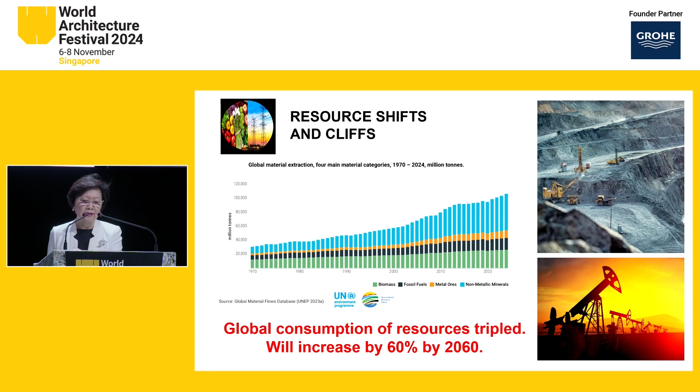So we really need to build smarter in a way that reduces raw materials, reduces carbon emission, saves the energy that is needed, and even shifts our diets to reduce food waste and reduce land needed for food production. So there's a lot to think about to rethink systems. How do we consume smarter, create more with less for everyone?

These problems are multifold exacerbated for Singapore, which has no natural resources. We only have a land of about 734 square kilometers. What is that? That's only about half the size of metropolitan London, but we are a country, we're not a city. And there are lots of challenges, and key for us is resource resilience. Do we have enough land, energy, water, and food? Really quite basic, right? But let's just have a look at land.

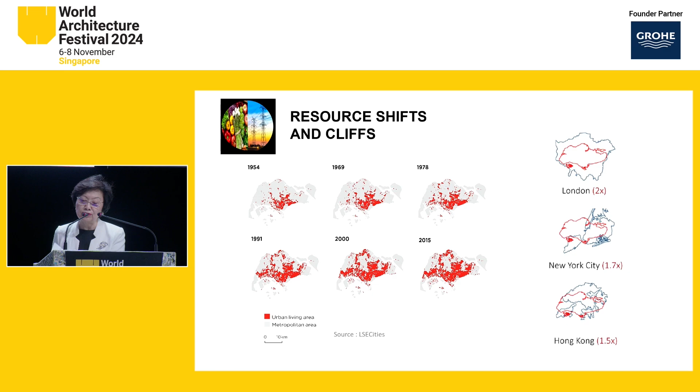If you look at Singapore, we've urbanized quite a bit over the last couple of decades. Right now, we are about middle age, with more land urbanized, and more sites will be brownfield. Development will come from brownfield sites. So the challenge is, how do we create a virtuous cycle of land stock for future generations? And how do we ensure water, energy, and food security?

Next, the world is far from achieving the global goal of limiting temperature rise to 1.5 degrees centigrade. The collective international climate change action will compel us to live in a carbon-constrained world. To hold 2 degrees increase by 2050, we need a 64% reduction in greenhouse gas emissions compared to 2019. To limit the increase to 1.5 degrees centigrade by 2050, we need an 84% reduction in greenhouse gas emissions. Looks such an impossible task.

In 2 weeks' time, I'll be in Baku, Azerbaijan, and there'll be a lot of talk shop, but I don't know how much action will be taken. So we really have to work very hard on this.

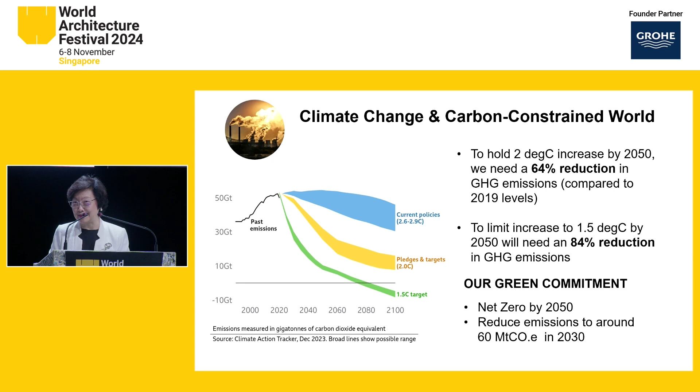Singapore, even though we're very tiny, has committed to achieving net zero by 2050. But for us to achieve this is really, really not so easy. So it's very challenging, even though we set ourselves that goal.

Our city is also aging. There is what I call a global aging challenge. Globally, our populations are rapidly getting older, except for parts like the African continent. And Singapore is aging very rapidly. We will be super aged in 6 years' time, very fast, with 1 in 4 being 65 years old. And this rate will accelerate to 1 in 3 by 2050. So you will see a lot of us aging by the time you come in 6 years' time.

And of course, with that are many challenges: rising needs and costs for healthcare, support for the elderly, and how do we achieve healthy, purposeful, and productive longevity?

But our city is also aging, not just us, the human beings. Our city infrastructure is getting older, and according to a Global Infrastructure Hub, the world is going to face a 15 trillion gap between projected investment and the amount needed to provide adequate global infrastructure by 2040.

There are some interesting statistics. US infrastructure was recently rated D+ overall. 85% of EU buildings were built before the year 2000, and among those, 75% have poor energy performance. I'm told that in Italy, some 300 bridges are at risk of collapse. There are also a lot of power plants in Europe and other places with load shedding problems. I was in Cape Town last year, and this was a huge problem. In Singapore, our infrastructure is also aging.

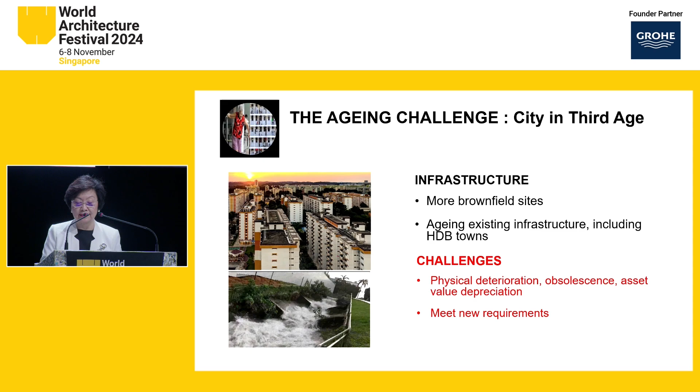An estimated 50 to 60% of Singapore's existing infrastructure will be over half a century old by 2040. And by 2050, some 33% of our public housing buildings will be 70 years old. 80% of the people in Singapore live in public housing. So we have to deal with increased prevalence of physical and functional deterioration and obsolescence, and also deal with stranded assets.

Finally, one big change is we have to cater to new economic models. The world has changed with technology, digitalization, and the advent of AI. Everything changes: live, work, play, learn. So how do we deal with that?

There are changing priorities and lifestyles of people. Right now, the jury is out on whether remote working is going to stay, because all the bosses say you better come back or you'll be fired. But the rest of us would love to work from home. We will see this changing, and there's been a big impact on real estate, commercial nodes, and new ways of working and living. So how do we make our cities relevant and continue to be attractive? I think that's going to be the big challenge.

For Singapore, we have a long-term planning process to try and deal with all these uncertainties. We have a long-term plan that we work on every 5 to 10 years, with a 30 to 40 year planning horizon. It's a very broad structured plan, although we have very detailed plans too. But we have to change the way we are planning, because the process has to change due to the uncertainty and volatility going ahead.

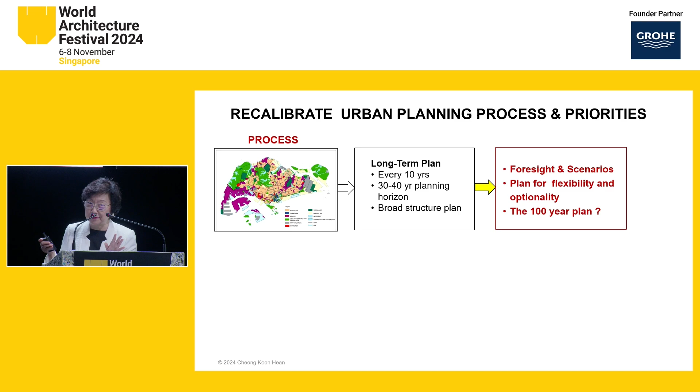So instead of doing specific plans, we now look at planning different scenarios. I actually advocate we should look even at 100 years. I know a lot of people think it's impossible, but I'll explain why a little later. At the planning level, as the complexity of urban issues and the pace of change have increased, planning projections for Singapore's long-term plan have evolved.

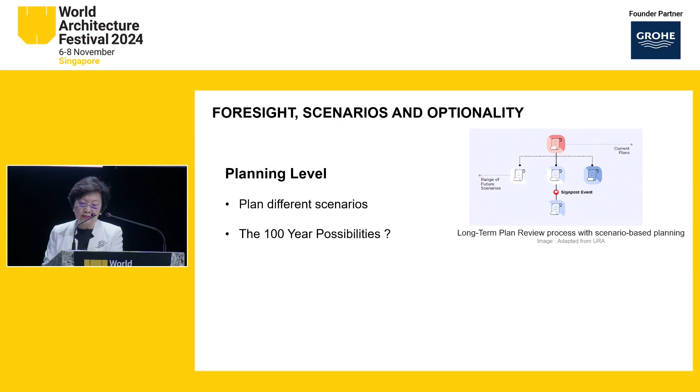We have to be preemptive and take a scenario-based approach. Urban planners have to consider multiple pathways and project a range of possibilities, not one plan. What if this happens? What if this happens? We have to put in place signposts that will help trigger reviews and decisions down the road. These signposts are really metrics we need to know, affecting the economy, health, social attitudes, social changes, demographic changes. We need to know these metrics because they raise red flags for us to know we need to change, because no single plan can stay the same forever.

So it's a very important consideration: signposting, and we have to scan outliers and emerging trends. For Singapore, our development going forward would largely be brownfield, probably 80% of brownfield sites. But they provide new opportunities for rejuvenation at scale, and we have many projects. For those more familiar with Singapore, we have multiple ideas for rejuvenation.

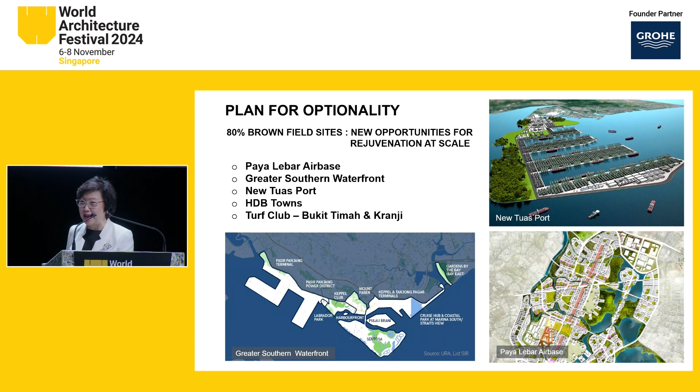We are going to move the Paya Lebar Air Base. We have moved the city port to the west, which frees up the entire Greater Southern Waterfront for new development. So we're going to build a new Tuas port. And we have many other large swaths of land that we can rejuvenate. So while we say we have no land, we do have land if we plan very well.

Another idea is that land use flexibility can provide very strong flexibility in the way we plan the city. Where you are now in Marina Bay, we first introduced the idea of the white zone, which allows the developer to put in multiple uses as needs change over time. Although the Urban Redevelopment Authority will stipulate a minimum component of specific use or specific uses to meet its planning intentions, we will introduce more flexibility into zoning. I think architects don't like the word zoning because it restricts what they can do, neither do developers. So the idea is to introduce more flexibility into zoning.

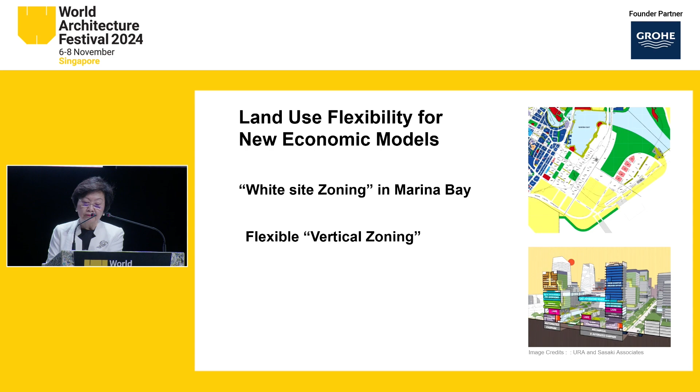For instance, we will explore vertical zoning in our industrial estates, which can integrate complementary uses. For example, you can have clean industries on the ground floor, and in the mid-floors you could have co-working spaces which buffer residential housing above. That is possible. Other ideas for land use flexibility include a business-white zone which allows industrial developments to have a greater proportion of non-industrial uses.

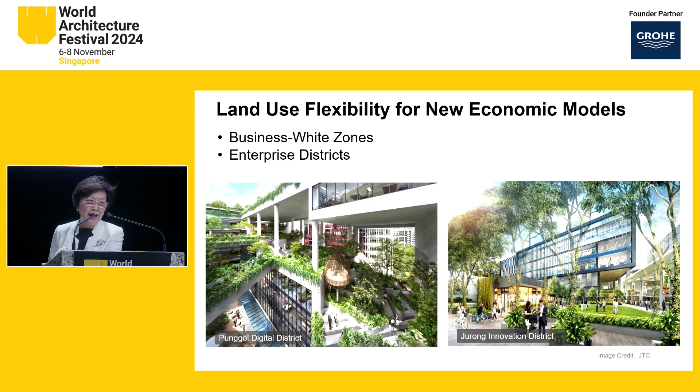So you can integrate the entire business value chain as well as complementary amenities within the development, adding co-working spaces, retail, food and beverage. But we are also looking at enterprise districts which allow a large master developer like the Jurong Town Corporation to use spaces across the district instead of being subject to existing development rules for each site.

So we talked a little bit about planning processes. But in addition to the process, our priorities need to change and be reconsidered. Traditionally, we are very preoccupied, especially in Singapore with very little land, with safeguarding and optimizing land and sea space and creating livable environments. This is a very common planning objective across most cities.

But I think we need new urban lexicon and vocabulary going forward. We now need to think about regenerative thinking, resource resilience. Our growth needs to be sustainable. Can we think of circularity as a principle? Can we steward nature? How do we build a healthy and high urban quality in our cities? These become new ideas and new priorities in the planning of cities.

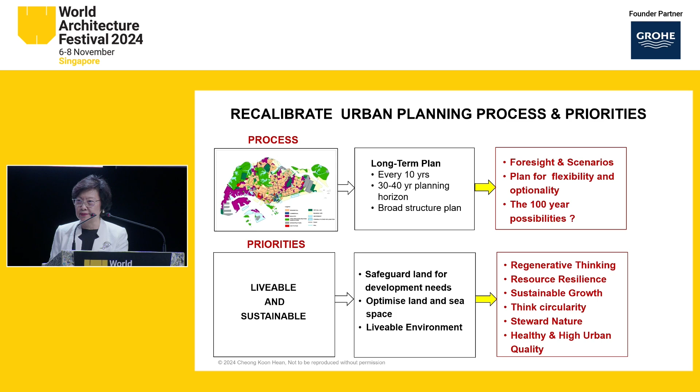So what is regenerative thinking and regenerative design? I think most of you know what it is. In very simple language, it is just about shifting from doing less bad to doing more good, and regenerative design is about achieving net positive outcomes. Not so easy to do, but the idea is that we must restore and rebalance our relationship with nature. We need to design a future where buildings are net positive, where infrastructure increases biodiversity, where urban planning restores natural ecosystems, and so forth. So there needs to be a paradigm shift in our thinking.

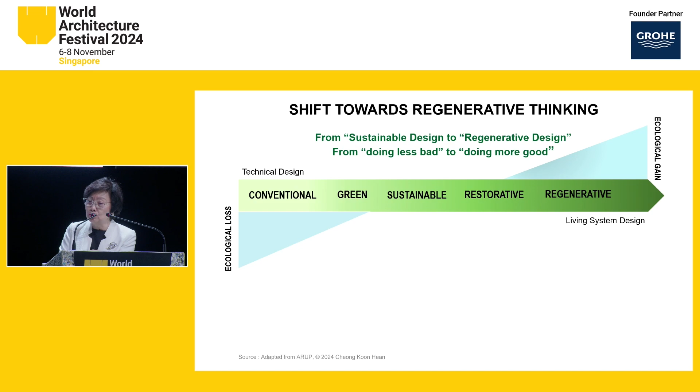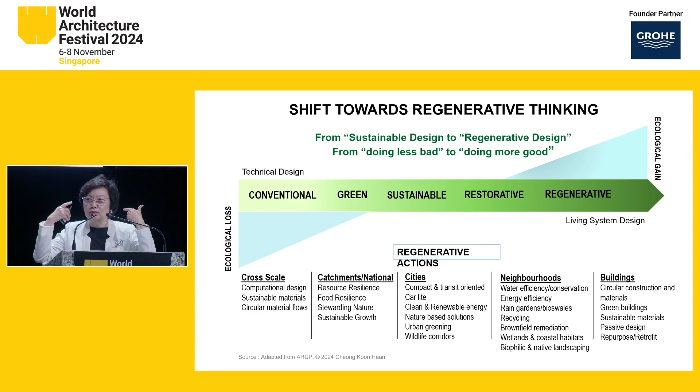Actually, it's not enough to just be sustainable, but to do a lot more and look at regenerative actions which can take place across different scales - national scale, cities, neighborhoods, and buildings. I won't go into this because in itself it's a very huge topic, but the point is we need to shift our mindset forward, going forward.

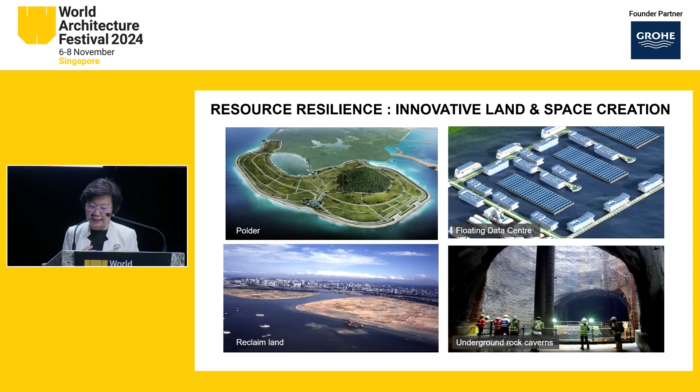So resource resilience, particularly for Singapore, is so important. And especially in finding land, how do we create space in a very innovative way? We have already tried many things, right? Reclamation, we have developed underground spaces, we built polders, just like in the Netherlands. But going forward, other ideas are important, like multifunctionality as a principle.

So let me give an example. Singapore is very low-lying, and being a city-state and an island, we are in danger of sea level rise. So we need to protect our coast. So we have already planned ahead to develop and reclaim this long island, which is about 15 kilometers long, about 800 hectares large.

And the idea is it will protect the entire low-lying East Coast. But it is the way that we will have to do it, in a very multifunctional way. This land, the way we reclaim, will not only be for housing and recreation uses, but we will also reclaim it in such a way that it can store water. So you notice that the land doesn't take up all the space - we create a new basin for storing fresh water.

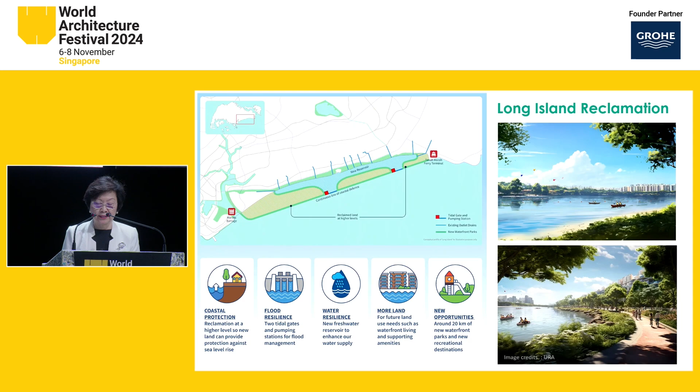So I will talk a little bit about water in my next slide. Water is existential to Singapore. We need water to survive. So we've worked very hard to close the water loop. So this is the idea of resource resilience.

And to do that, we rely on 4 taps. One is imported water - we do import water traditionally from Malaysia as one big source, but you can appreciate that Malaysia too will need water. We cannot rely on that forever. So the second tap is domestic sources, NEWater and desalinated water, which I will walk you through.

Domestic sources means that you pray very hard and it rains. Actually, in the tropics, there is water. But why is it that people say they don't have enough water? The key is that we are not collecting efficiently. There is water, but we're not collecting it.

So in Singapore, we've done it in such a way that it's really a sponge city. Two-thirds of Singapore is water catchment, and we will increase this to 90%. So everything that falls down, we collect - we collect everything. But if you collect, you need to store it. So in tiny Singapore, we have 17 reservoirs. All the inland water bodies and rivers are converted to freshwater reservoirs.

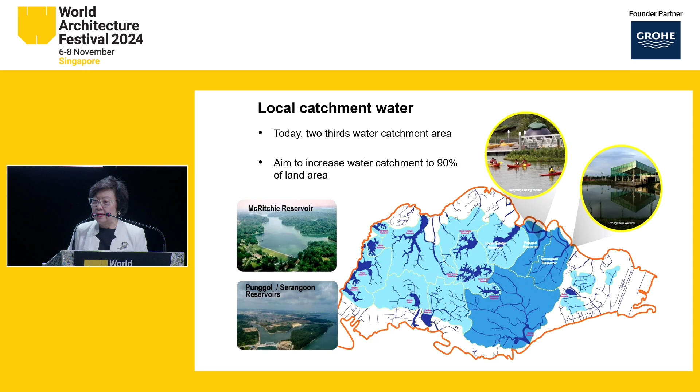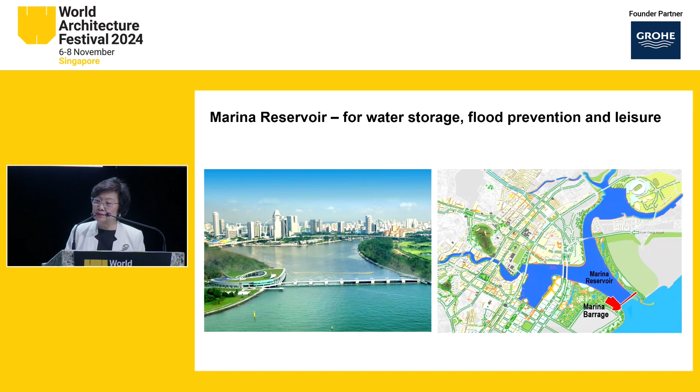A very good example is right here in Marina Bay. When we reclaimed the land, we built a barrage and we created the largest freshwater reservoir in a city, probably in the world, because we collect everything that falls, right? Another idea is really NEWater - we recycle all used water. So maybe you had a drink of water in Singapore. Guess what? You might be drinking a lot of other stuff too.

But don't worry, we only put very little of recycled water back into the reservoirs. Most of it is so clean that it's used for industry, for example, wafer fab production.

What is interesting is that to recover the water, everything from what you flush to what you wash, we have introduced this idea called the deep tunnel sewerage system. The DTSS is about a 200-kilometer massive superhighway for water, 15 stories deep underground in Singapore. Through gravity fall, we collect everything into the water reclamation plants that are placed underground, and the water is processed and purified into new water.

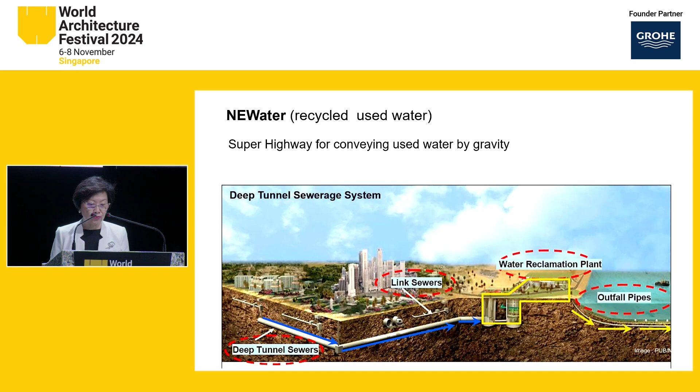Of course, we also do desalination, but this is one of our newest desalination plants. It's right in the middle of a park. So again, the idea of multifunctionality. Underneath are a lot of pump rooms, but above is for recreation. It's a beautiful park. You can go there, you can jog, you can run. This idea of multiple uses of infrastructure with recreation and other uses is very much in our DNA when we design and plan.

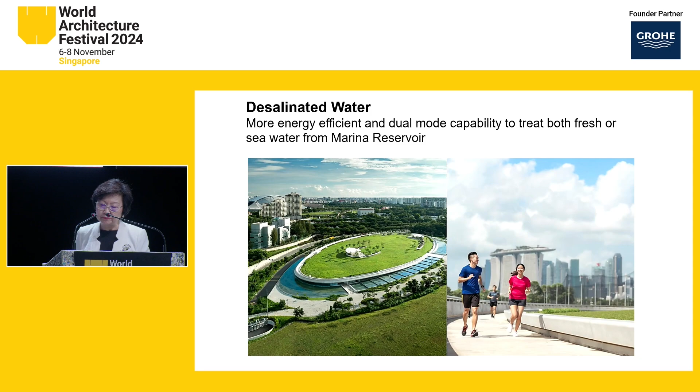But while we've closed the water loop, we have a new problem. It's energy. Because to desalinate and to use membrane technology to recycle water, you need energy. And we don't have energy. We import almost everything. So what we've done is we have tried to strengthen the waste, water and energy nexus.

So what we have done in one of the latest state-of-the-art infrastructure is to co-locate the Tuas Water Reclamation Plant with the Integrated Waste Management Facility. In Singapore, how do we deal with waste? We have no place to chuck our waste, we only have one landfill offshore. Everything is incinerated, but you still have the ash after you incinerate, right?

So when we incinerate, we generate heat, the heat drives the water reclamation plant. But when you reclaim water, sludge is left over. The sludge is converted to biogas that in turn generates electricity for the incineration plant. So here the idea of circularity becomes very important to close the loop for energy. And yet you are now using energy to create water, but you are using water to create energy. So I think these ideas of circularity are absolutely important for all cities.

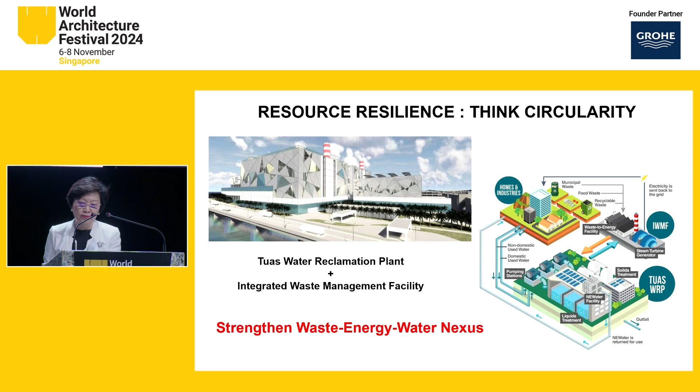We have 4 taps for water, but we have 4 switches for energy. We do import a lot of gas. We are mounting solar panels everywhere, but we are also tapping into regional power grids in ASEAN to buy energy for Singapore. In fact, there is a private company that's going to put solar panels in Australia, and they're going to pipe all the energy all the way to Singapore, the clean energy just generated. We're also looking at emerging low carbon alternatives, green hydrogen, for example, and carbon capture.

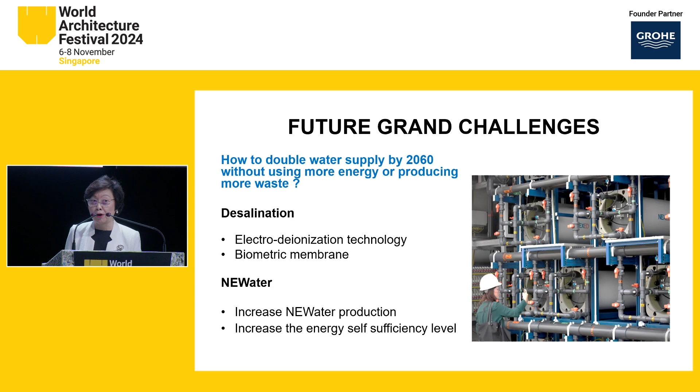I also want to say that we continue to try and innovate. So how do we double our water supply by 2060 without using more energy or producing more waste? We are looking at new technologies like electro-deionization technology using biometric membranes. They use a lot less energy. And we are going to increase the NEWater production and increase the energy self-sufficiency level. So it's all about innovation, and it's all about adopting technology that is highly innovative, that can solve our problems. So we have to work very hard at this.

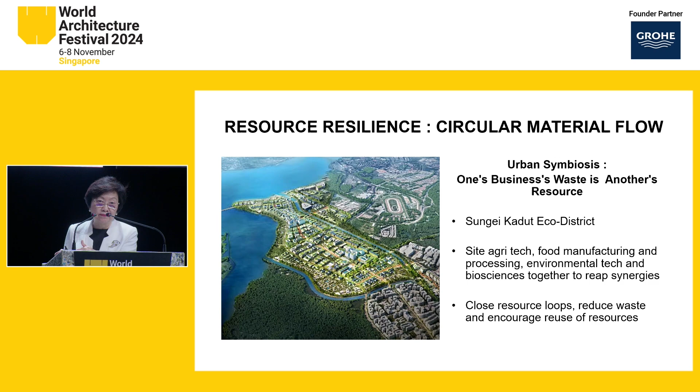And of course, food. While we import food, we try to be self-sufficient in nutrient needs in some of the food that we have in Singapore. So we are converting a lot of roof gardens to urban farms. We are integrating the idea of urban farms in the way we plan our towns. And of course, resource resilience and circular material flow ideas apply a lot in planning. For example, we have this industrial estate whereby we are going to place different types of users together that can feed into each other. So you can have food manufacturing together with environmental tech and biosciences together, because one company's waste can then feed into another company as a material use. So you can do that through, again, the use of urban planning.

So very quickly, city structures are important to mitigate very high densities. And of course, for city structures, we have adopted 3 ideas. One is polycentricity, and we are highly transit-oriented, which means that we have decentralized a lot of our commercial nodes outside of the city area, very well served by public transit. So this reduces congestion into the city, and it reduces the need for cars to move around and emit carbon emissions.

So we have a very dense rail network, and almost 80% of homes will be within a 10-minute walk from a mass rapid transit station by 2030. We're almost there. A lot of the lines have already been built. So we are seeing less people needing to own a car.

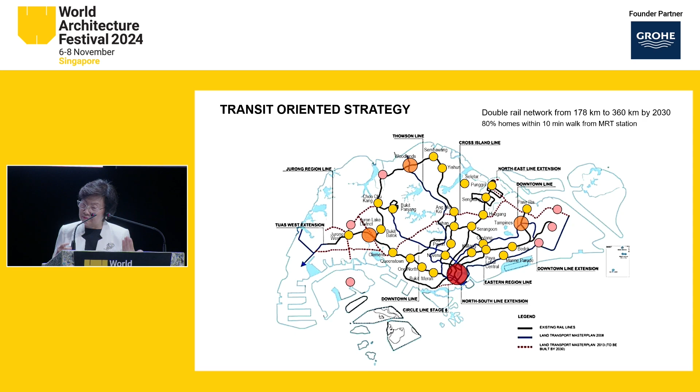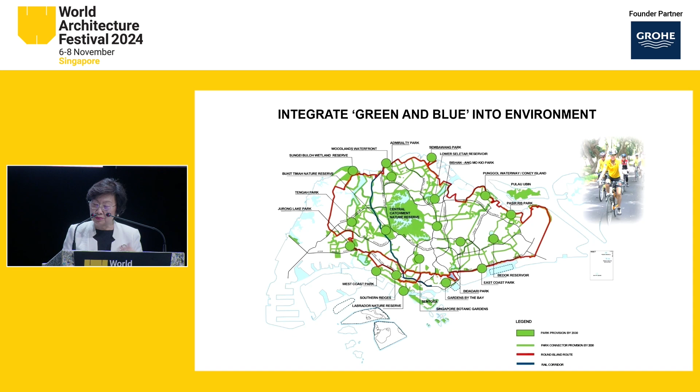In addition to park, it's about stewarding nature. Right in the heart of Singapore is actually a primary forest. And if you are visiting Singapore for the first time, one place I would recommend that you go is the zoo, because the zoo is there. The night safari is there. The bird paradise is there in this virgin tropical forest right in the heart of a very, very dense city.

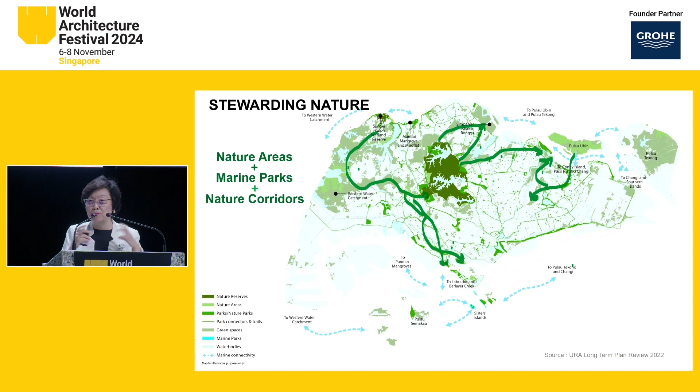And what we do is we link up all the nature areas that we've protected with eco corridors, because these become corridors in which animals and bird life and biodiversity can move from place to place. We too need to create virtual space and the sense of space for them. So Singapore stewards nature. Our concept is about having a city in nature, not just a garden city. So we're bringing back biodiversity into the city.

Now, if you walk along Marina Bay, there are families of otters who live there. You might actually spot them. And actually in the gardens by the bay, which is next to this development, please take time to visit it, because it is also a bird sanctuary. A lot of people go there to observe the birds.

We have Changi Airport, so we're a hub, right? An airport, a good airport, and people transit here. But actually, many of the birds transit here too. They transit from Europe to Singapore to Australia. So we also create transit stops for them.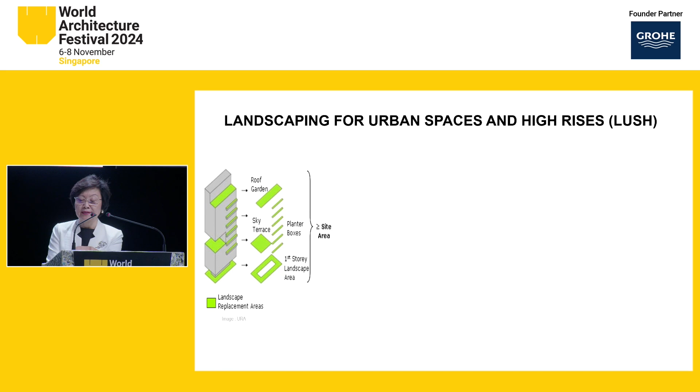But as we use up our land, we start to bring greenery towards the sky. So we have this program called LUSH, the Landscaping for Urban Spaces and High Rises. We incentivize the developers to bring greenery up to the sky and create new recreation spaces. So for example, in Marina Bay, the requirement is that as you build and remove your footprint, you have to put 100% greenery replacement in the sky.

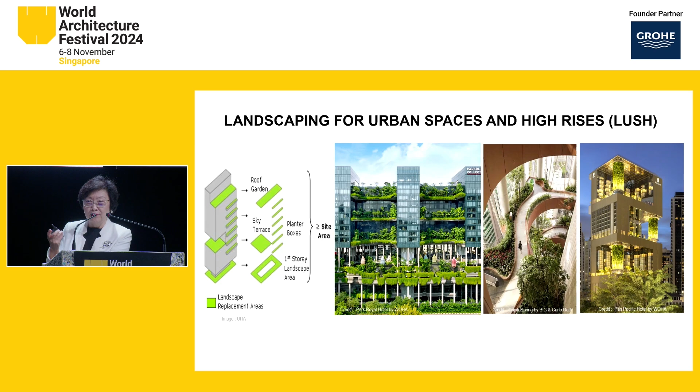But architects have become so creative that most of them now replace more than 100% of the footprint that is used up, sometimes as much as twice or even 3 times through very, very clever design. So we must thank the architects for the creativity.

And we have also converted many of our concrete drains into naturalized streams. And these streams are used as nature-based solutions for floodplains. So therefore, it also adds greenery back into the towns and the cities. So here again, it's multifunctional. It's a park, it's also a floodplain, but it brings a lot of green and blue into the city.

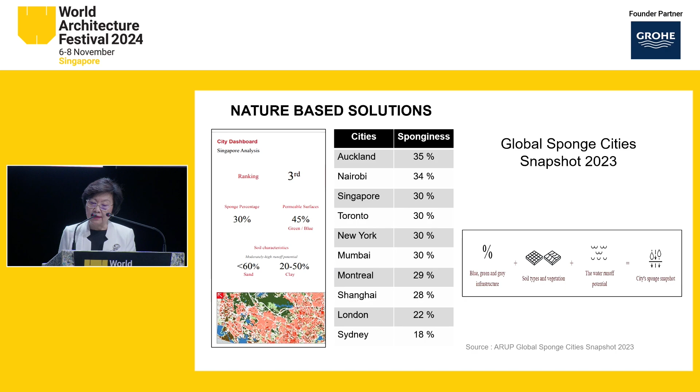So if you look at Arup's Global Sponge Cities snapshot in 2023, it calculates a city's natural absorbency from its green and blue spaces using Terrain, which is an AI tool that digests large quantities of data and satellite imagery. I think this was developed by Arup to help enhance nature-based infrastructure. So Singapore was ranked 3rd out of 10 cities in its sponge percentage, despite being a very high-density built-up city. So it is possible to bring nature in.

Now, very quickly, Professor Ian Goldin, in his book on the age of the city, postulates that as cities compete in the next few decades, unfortunately, only some cities will be the star cities. So if cities want to do well, they must have that high urban quality to attract and to retain talent. At the same time, companies are actually drawn to invest in cities that have ample talent. So unfortunately, it's almost only a very handful of cities that will do very well, and we have to work hard at being one of those cities.

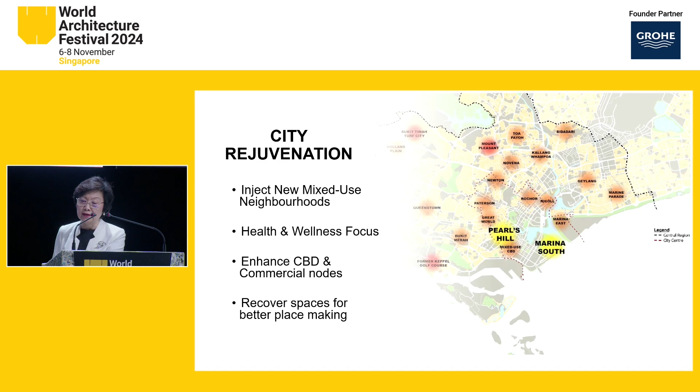So a key strategy is, of course, to develop high urban quality. So we continue to rejuvenate our city constantly, all the time, injecting new mixed-use neighborhoods, having a health and wellness focus, enhancing the CBD and commercial nodes, and great placemaking.

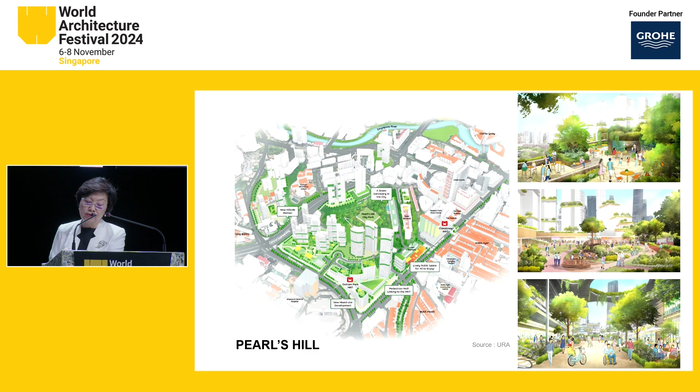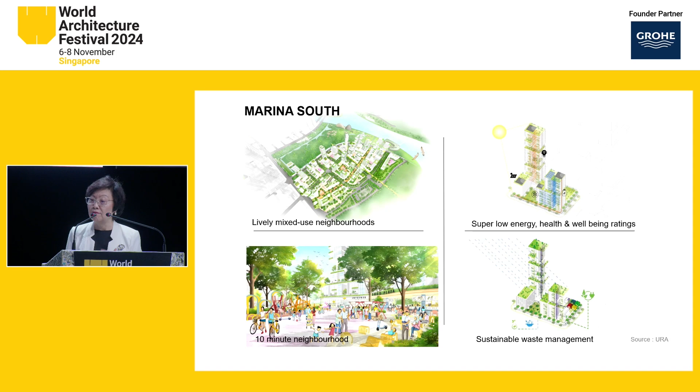So within the city, I'm not going to go into detail, we are going to develop new areas for rejuvenation. This is Pearl's Hill, which will introduce another 6,000 new homes into the area. Marina South, which is just next to us, will be new, lively, mixed-use neighborhoods with super low energy buildings, with health being a very major consideration in the design. 10-minute neighborhoods, very walkable and highly sustainable in its design and construction.

Now, it is really also about rejuvenating the city. Let me try and get back.

In the CBD, we all have downtowns and we worry that they will deteriorate. So we introduced incentive schemes, like the Central Business District Incentive Scheme, to encourage older buildings to be rejuvenated for mixed use. We also have the Strategic Development Incentive Scheme, encouraging developers to get together, so it's not just a single project but with neighboring projects you do a much larger scale redevelopment. Now there's also a lot more housing in our CBD, which previously was quite dead in the evening, but now more housing has come back.

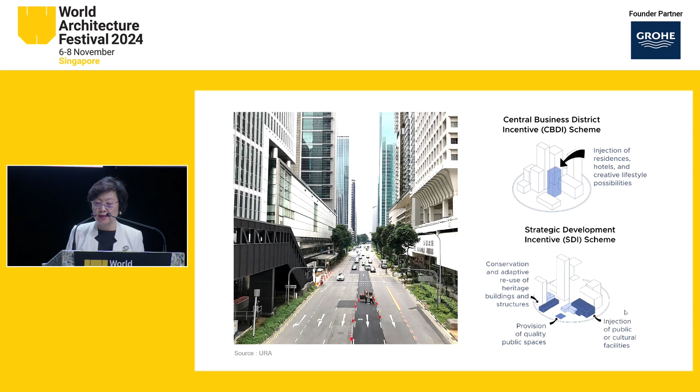And it's really about creating delightful spaces. I'm preaching to the converted here, the architects - placemaking is absolutely essential to have a vibrant city.

I'll run through this quickly as I've run out of time. I want to talk about public housing. In Singapore, almost 80% of people live in public housing - that is the real Singapore, not Marina Bay. So if you have some time, take a train and visit any of the public housing towns, developed by the Housing and Development Board, HDB. That's the real Singapore, and that's how people live. Our conception of public housing in many cities is that it's run down and deteriorates, but our towns are actually quite vibrant and decent. I encourage you to visit.

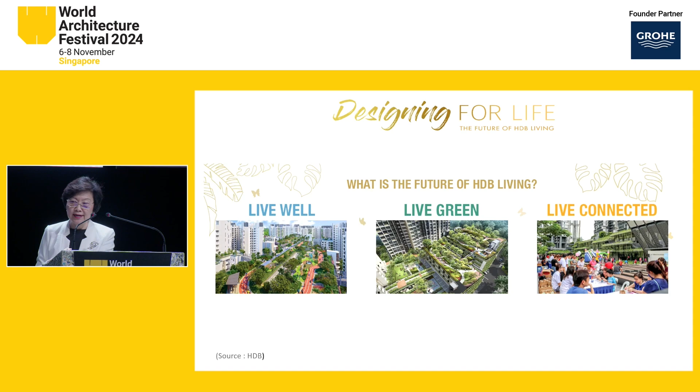Going forward, public housing towns keep getting rejuvenated, and new generation towns have themes of living well, living green, and living connected. These are the types of designs we do for public housing towns, particularly the new generation towns - the quality is good, almost as good as mass market condominiums.

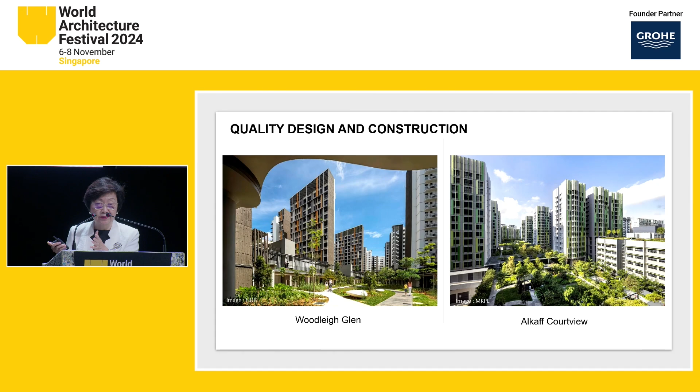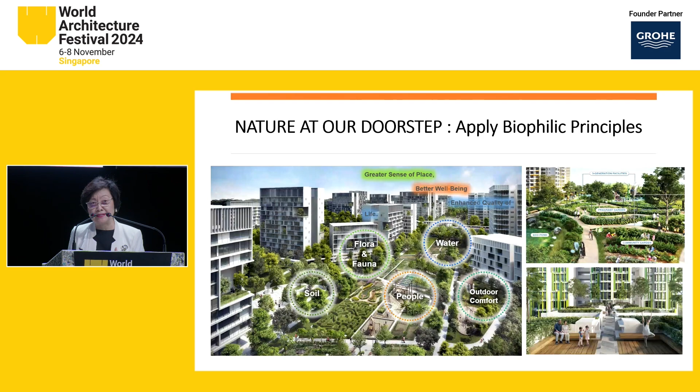It's important - the way we plant, we bring in biophilic principles and this whole idea of regenerative cities. The way we plant is to bring health benefits to residents. We have lots of parks - therapeutic parks, educative parks, and parks for people with dementia - to promote mental wellness. Health and wellness will be a big theme for the design of these new towns.

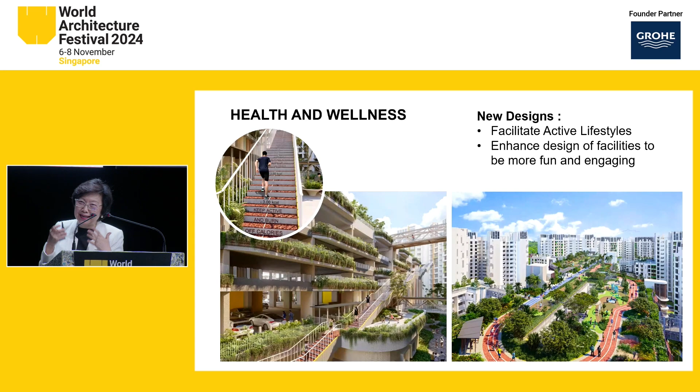This is a real project - we put running tracks on top of multi-story car parks, and we're fitting in motivators and nudges for people to move when living in the town, for better health.

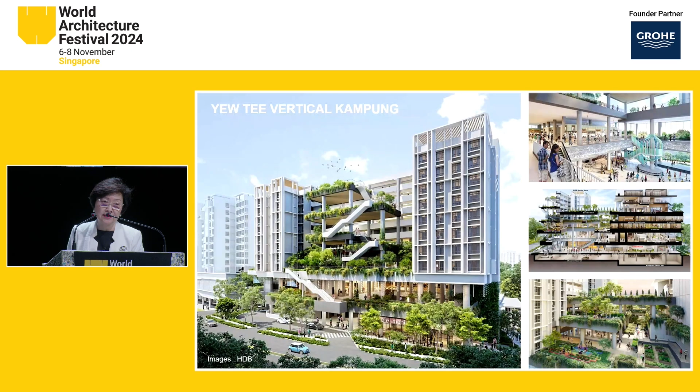A lot of it is mixed use. We're introducing mixed users into the neighborhood centers, with healthcare facilities, shops, and eating facilities. They are gathering points for social wellness and strengthening community bonds, and a lot of activities take place in these neighborhood centers.

As the population ages, we introduce new ideas for housing. This is a new form of assisted living housing called community care apartments. People here are still healthy but might need help with one or two physical activities - they might need someone to cook for them, or help with a bath. So they live here in a community, in smaller flats but with a lot of areas for interaction, and they can subscribe for services to help take care of them.

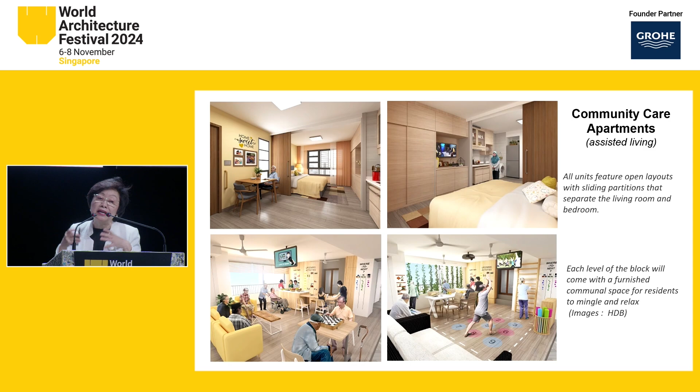So we have the concept of aging in place, trying to get people to age where they live. And there is continuous rejuvenation.

We go back and retrofit and fit out our towns - we have the Remaking Our Heartland programs. We even fit out the interior of the flat - when it has aged, we retrofit new toilets. There's a co-sharing arrangement with the Housing and Development Board - you pay some, but the government pays the majority. We go back and rejuvenate the neighborhoods, and we even rejuvenate all the shops.

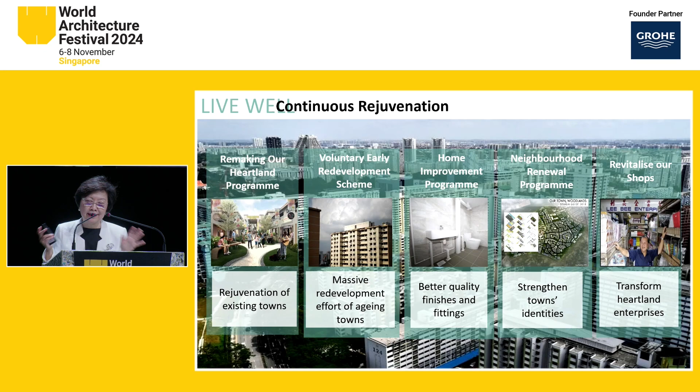This is a topic of its own, and I have no time - I'm only showing one slide. But if you have time, visit the Housing and Development Board, they have a great gallery explaining all the proposals they do.

Finally, it's about building green buildings. I won't go through it in detail, but it's important - I want to encourage architects to think about the way we design. Here I'm talking about building level, not city level.

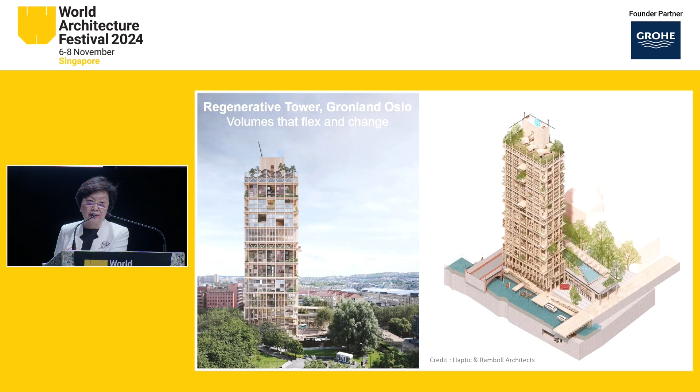The idea is that you can renovate the building. You don't have to demolish everything because there's so much flexibility built into it. These are some ideas we should be thinking about as we develop new buildings so we don't have to pull them down, and they can be retrofitted instead.

It's also about an ethos of sustainability from the outside in. Matrix 1 in Amsterdam is an example. The facade features aluminum cladding, screwed directly onto wooden facades for easy disassembly. The idea is you want to save materials and be able to reuse them.

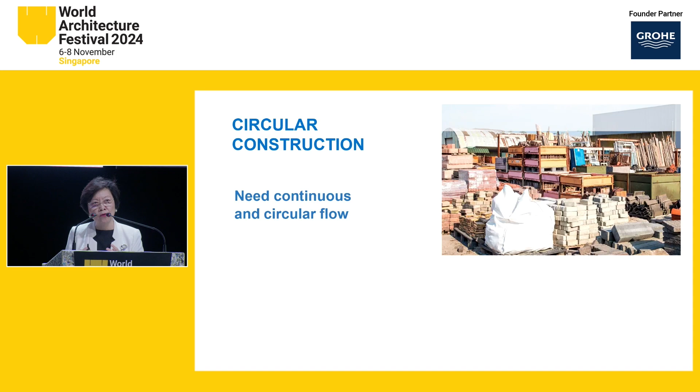Which leads me to this point: it's about circular construction. We need a continuous and circular flow of materials that can be recycled, which leads to the idea of material passports.

There's a need for a lot more research on how to track building materials used in a building. Some research is being done in Singapore, where you can actually track materials and develop almost an inventory for every building. So if the building needs to be pulled down, you can recover these materials.

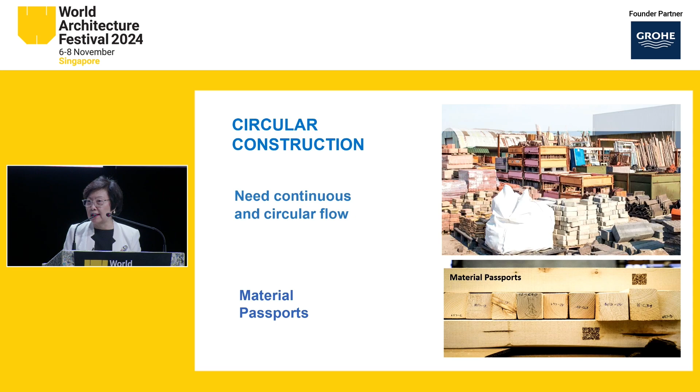This information about materials should be made known to people. You could actually buy materials from a building that's being pulled down so you can recycle. I think there needs to be some movement towards this in the entire construction industry.

It's also about moving from net zero to net positive. That's the challenge for us all, architects. Can we think of ways to move from net zero to net positive? We have started in some way, but we're a long way to go.

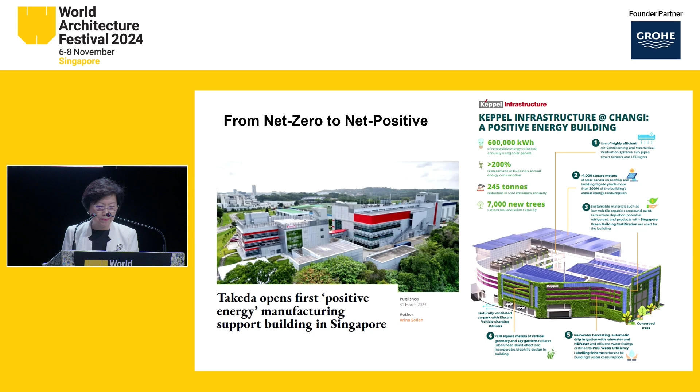Finally, I advocate the use of science and technology to help us. Singapore is no stranger to the use of science and technology. We have no choice—we have to be innovative to improve our resilience.

So whether it's for planning, we do use a lot of data to help us. And now we're bringing in the use of AI to help us project, predict, and run scenarios. The use of technology is going to be much more important going forward, whether for urban planning or design.

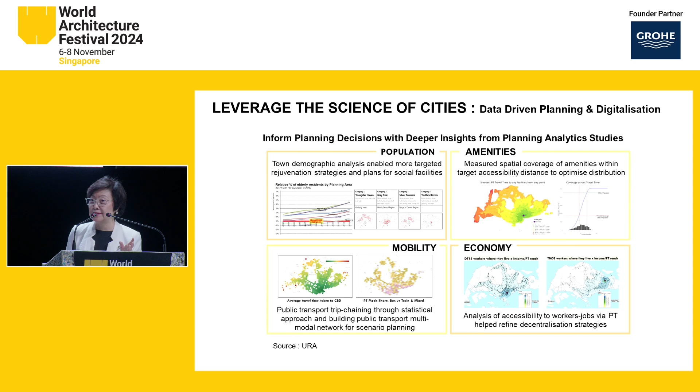I think many of you might already be using AI for computational generation of designs, with multiple options, and for each option you're able to tell what your carbon footprint and urban heat generation is. This all helps designers—we can use this as an enabler.

So that's my last slide. I think the objective is really for us to work together to build a better tomorrow. But we have to be very conscious of what we need to do, and very conscious in our design. Thank you.